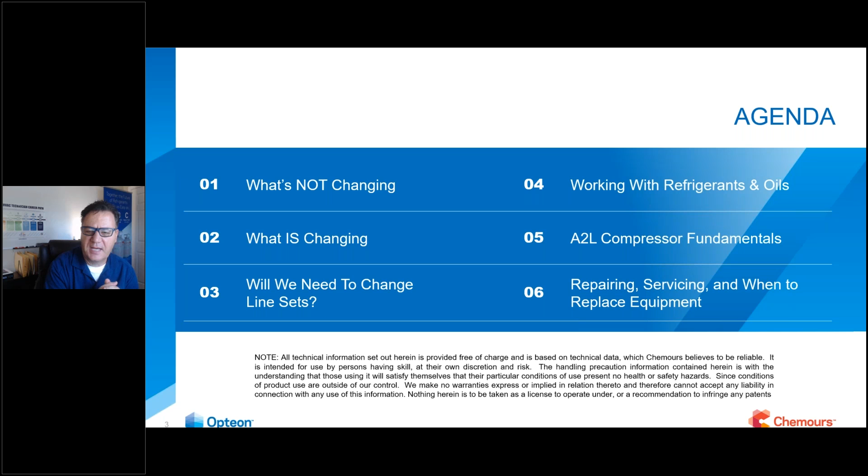Thanks a lot, Chris. So real quick, the first part we're going to talk about is what's not changing - we always talk about what's changing. The second part is what is changing. Third will be need-to-know, will we need to change our line sets and things like that. Fourth will be working with refrigerants and oils, that'll go pretty quick. The fifth will be A2L compressor fundamentals - we'll talk about what's changing. I can't speak for the compressor or equipment manufacturer, but I do know a couple things we'll cover. Last but not least is repairing, servicing, and when to replace equipment. We'll also talk a little about reclamation, recovering refrigerant.

All right, so let's go. What's not changing? As of today, you will be grandfathered in with your EPA 608. Moving forward, you'll see those questions, as we did with 410A, on A2Ls on the new test. So as of today, there's nothing federally or state recognized as far as an A2L certification. I want to be clear about that, because as Chemours does, there's a lot of folks out there giving certifications - those are certifications recognized by that organization. It just means you've done some A2L training. I've heard some people need that proof in whatever municipality or state they're in, so check with your manufacturers - do they want you to be A2L certified? Check with your wholesalers and distributors before they sell you refrigerant - do they want you to be A2L certified? But as of now, EPA does not require that.

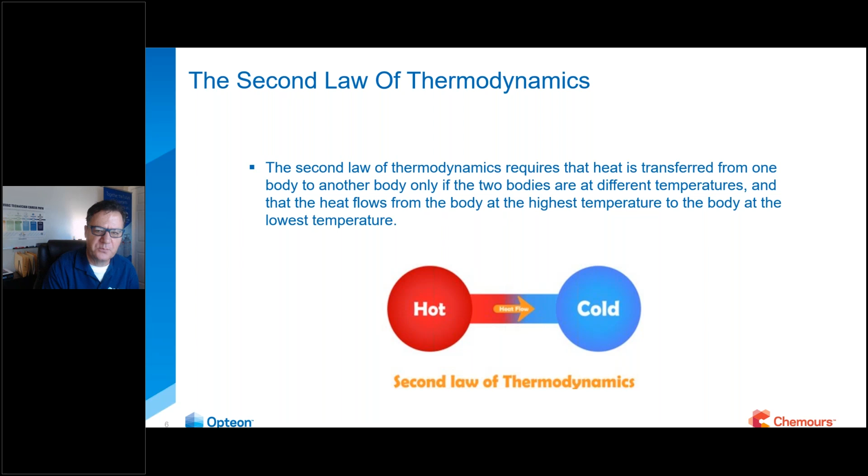What else is not changing? Well, the second law of thermodynamics. It sounds easy, but what is it really telling us? In very simple forms, because I don't like big words - hot goes to cold, high pressure goes to low pressure, and if you're into IAQ, wet goes to dry. It's pretty simple. Some people would argue that hot's really an opinion, but anyway, warm goes to cool and high pressure goes to low pressure. The reason I point that out is the system, the DX system, from an HFC to an HFO or an HFO blend, is going to stay the same. So we're still going to be dropping our pressure there at our TXV, our pressure dropper if you will. When we drop the pressure, we drop the temperature.

It's been superheated. As we move through the coil, we're not really making anything cold, we're removing heat. That's what we are, we're heat movers. As we come down the suction line, the idea is to be all vapor or superheated vapor, or we hear crunchy noises in our compressor.

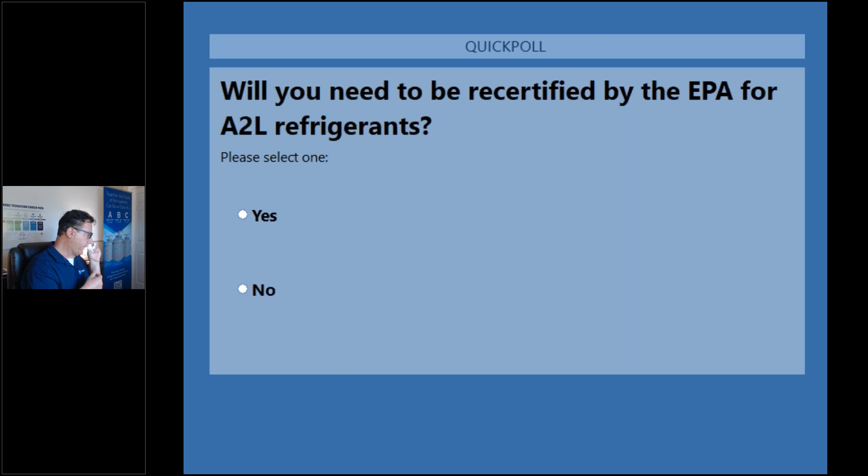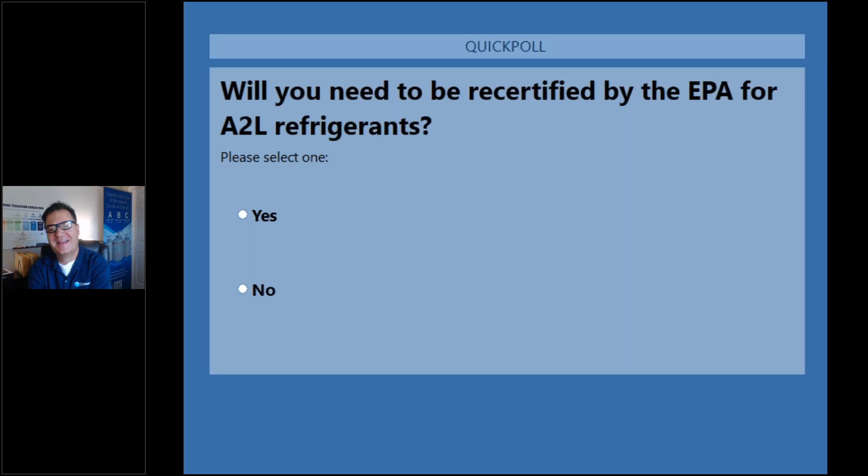Well, you seem to be a very good teacher, Don Gillis. 100%, I'm saying no, 100%. Yeah, well, very good, everyone. So at least we got that through and everyone knows, because there is a big misconception out there about that, believe it or not. So thanks, Chris, I appreciate it.

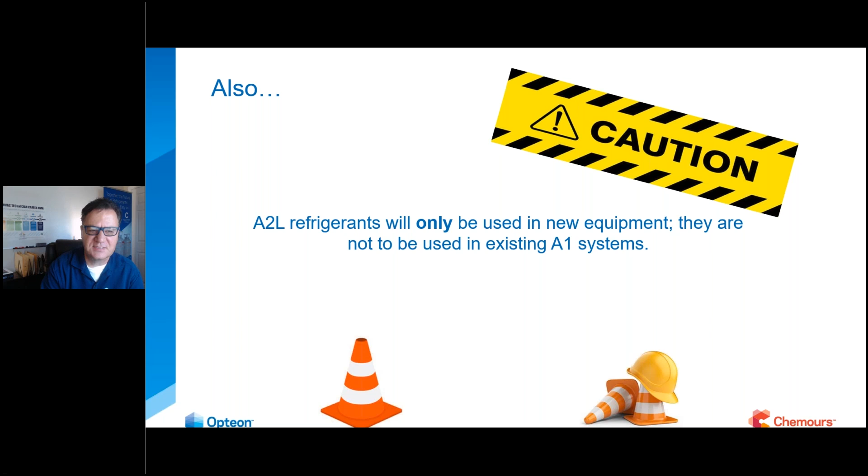Of course. What is changing? First of all, you will not be able to put A2L refrigerants in an existing system. A2L refrigerants will only be used in new equipment, whether it's HVAC or commercial or whatever. They're not designed for it. There is no retrofit kit at this time, so be aware of that, all right?

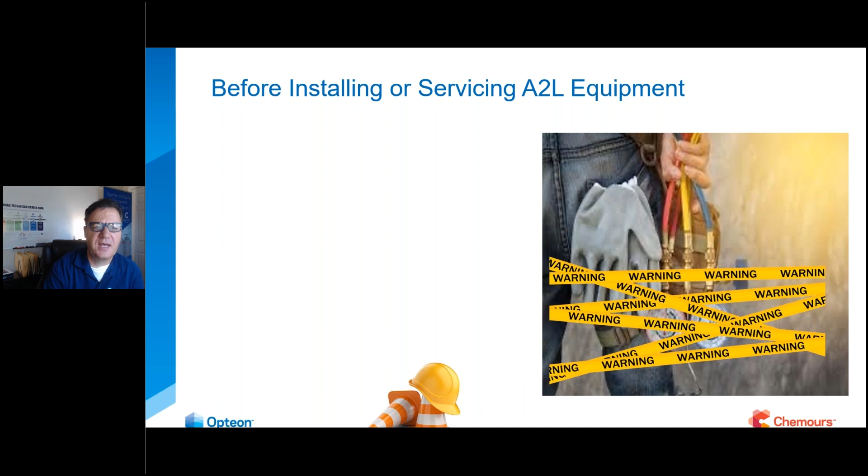Before installing or servicing A2L equipment, this comes right off of AHRI's Safety and Handling Task Force for A2Ls on their website: safety first. As always, we're going to read the manual. Follow lockout tagout procedures when needed. Verify there's no voltage present before working, okay?

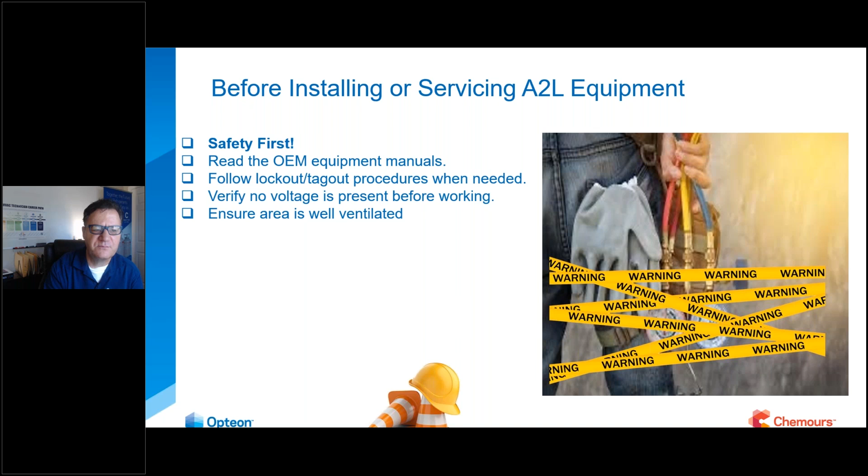And that's been something that's been around forever, okay? And in fact, all these first five bullet points are pretty much the same as it was.

Ensure the area is well ventilated. Evaluate the work area. What do you mean by that, Don? Make sure there's no ignition sources, flammable vapors, confined spaces, and look for a clear exit point.

Now, I know that sounds like a lot more than what we did in the past, but quite honestly, this is stuff we've always done when we're working with refrigerants. In some cases, we've had to use ventilation in past histories with just A1s, whatever you're using.

Now there is a big change here, the biggest one for me, is at this time it's not required, but it's recommended to have a 10-foot work perimeter. If you want to search that out, it's in UL 2-40. UL makes the standards for the safety of the equipment, ASHRAE is the safety of the installation. So if you want to find that, it's in Annex HH. It mentions that, and at this time, it is not required.

Something required would be a good visual there, like a utility company out on a corner with a bunch of orange cones or yellow tape. That's required by the state. At this time, this is not. So don't have Joe or Julie out there smoking, just obvious common sense things like that.

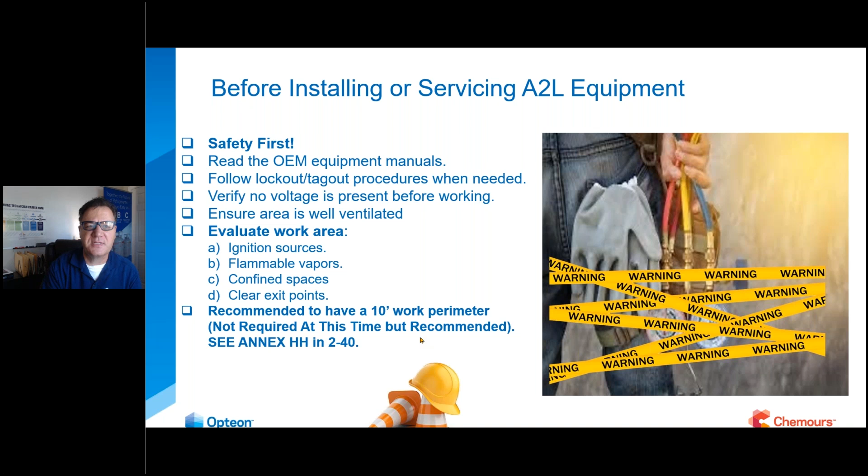Piping procedures, new install, we're still using ACR. It's seamless dehydrated and it's measured in OD, unlike plumbing that's measured in ID, okay? So use the correct size. Cut with the proper tools when deburring as required.

So don't use a Sawzall. Those little burrs out there, make sure they don't fall inside the copper. Those end up on your windings on your motor, and it doesn't happen right away. It happens, takes a little time.

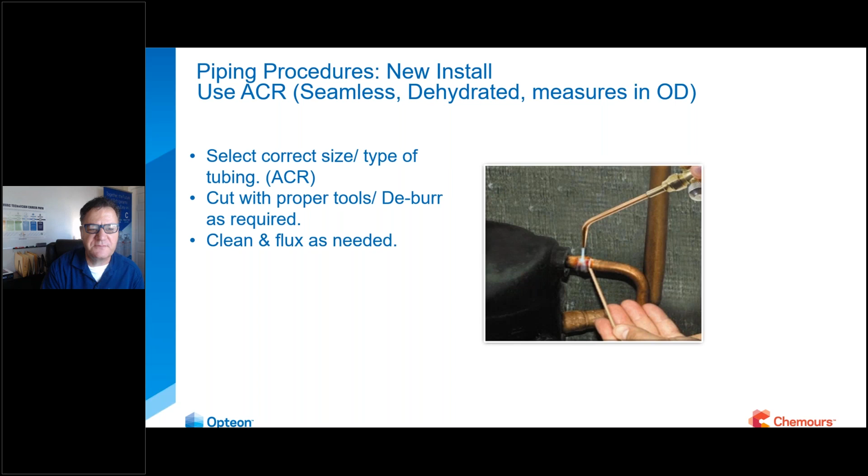If you're using flux, and I don't mean what's in your brazing rods, be very careful. Just like moisture, that's acidic, okay? And you ensure proper fit and fastening as required.

Follow all codes if you're licensed, and select proper heat source, whether that be acetylene or acetylene and oxygen. I prefer the acetylene oxygen, it gets hotter, it gets quicker. Acetylene's fine, it's lighter, it's easier to carry up those 40-foot extension ladders.

And then one other thing I wanted to share with you here about brazing. When I was taught brazing, kind of like what this torch is right here, it's heating up that female fitting. But since they changed that material to a copper-clad steel and not pure copper anymore, if you're using a torch like acetylene and you stay on there a very long time and get it cherry red, something you can share with the contractors.

It's just a film around there, that copper clad steel is. If you eat that away, it's solid steel. And I've done it twice in my life and it's a very long day.

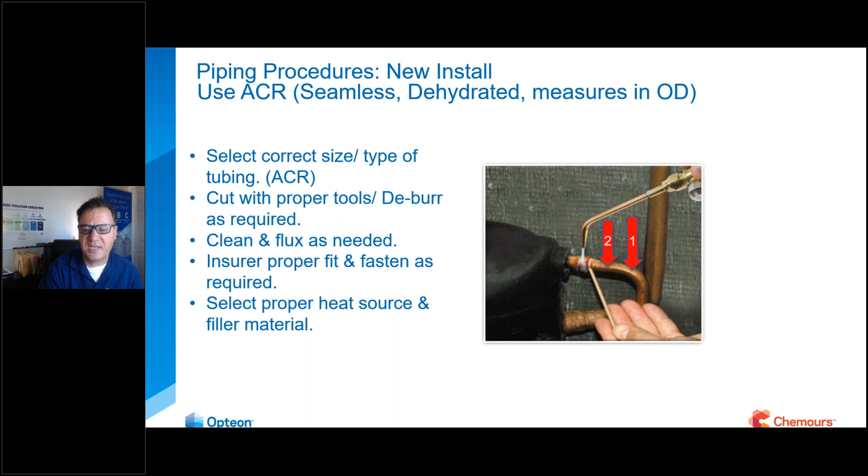So we're going to use conductive heat, one of the three heats we were taught in HVAC in our early career. And we're going to heat out here first to warm that pipe up. And then we're going to come in a little closer at the second. And then last but not least, we'll come in with that third arrow. And then by the time we get there, we're staying on there very little because it's already warm enough to suck that brazing rod in.

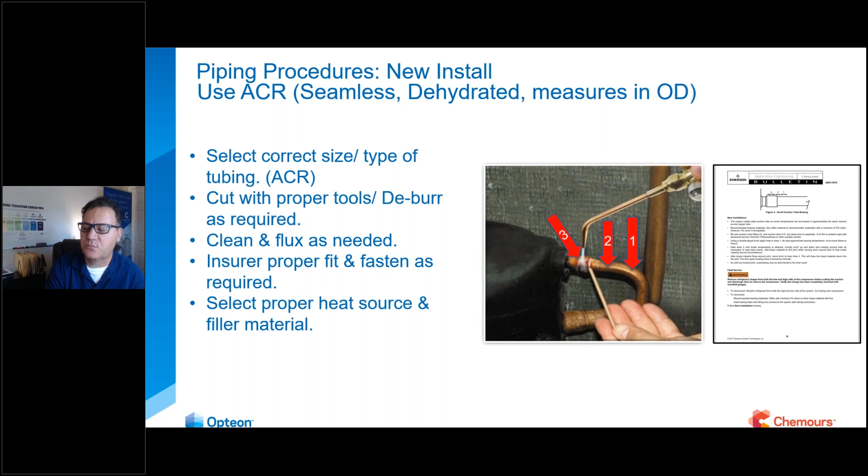There's actually a bulletin, I'm going to show you that right over here on the right-hand side that tells you more about that. I refer to it as the 1, 2, 3 step. Okay, so just a fun fact there on that.

And then we're going to purge with nitrogen or inert gas, nitrogen in most cases for that. Why do we purge with the nitrogen? This is why we purge with the nitrogen.

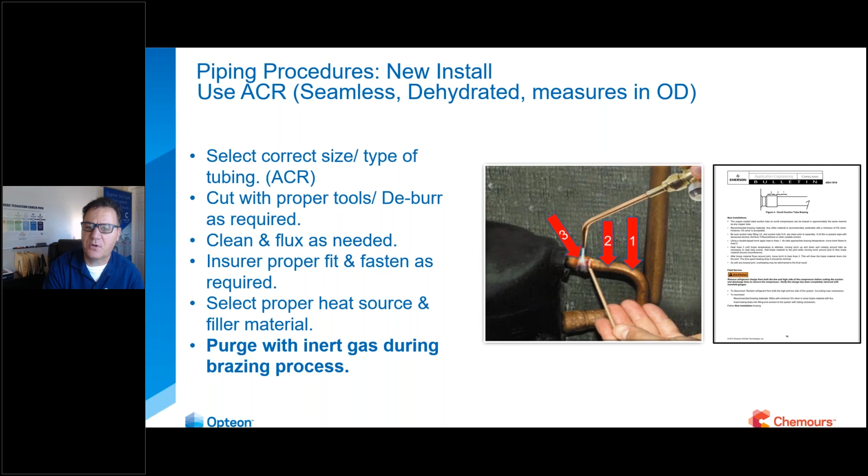This is an actual picture of something I did 6 years ago at my previous job. On the left-hand side, I went into the lab in the summertime when we were slow, and I brazed without nitrogen on the left-hand side and with nitrogen on the right-hand side. You can see the outcome here. And the ashes that you're looking at there, gang, is actually from inside. We always see this on the outside, but it was really surprised when Corey opened this up for me in the labs and cut it open, and this fell out, even for as long as I've been doing it.

The thing about this is POE oil really changed the world. It's very hygroscopic, it absorbs moisture really well, and it's very polar. It will make this look like this in a very little time.

And this stuff here normally ends up in your TXV, okay? And that's when we think we have a bad TXV, when in fact we just used bad installation practice. And I'm as guilty as anyone, just so you know, okay?

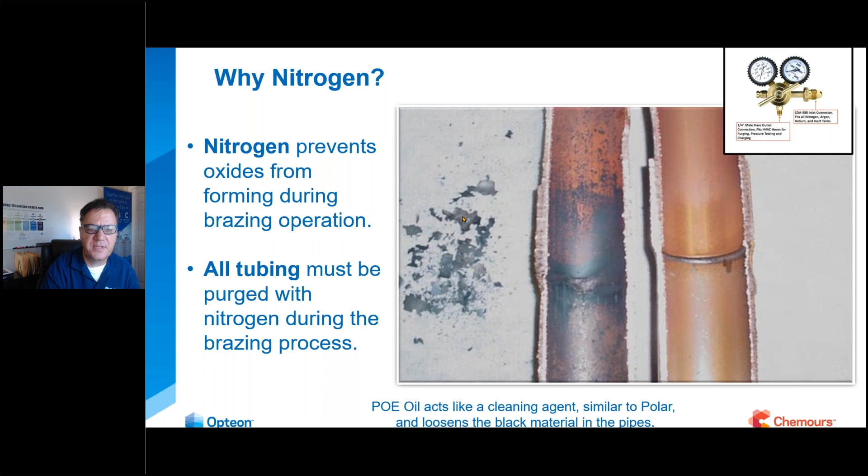When we're purging with nitrogen, some of the facts we need to do: we need to protect the components with a wet cloth while brazing. There's a lot of products out there, things like wet rags, I'm sure you know this better than I do. I just gave some samples out there. Always remove your Schrader cores to make sure you don't melt those O-rings. Hook hoses up, set the regulator for less than a pound.

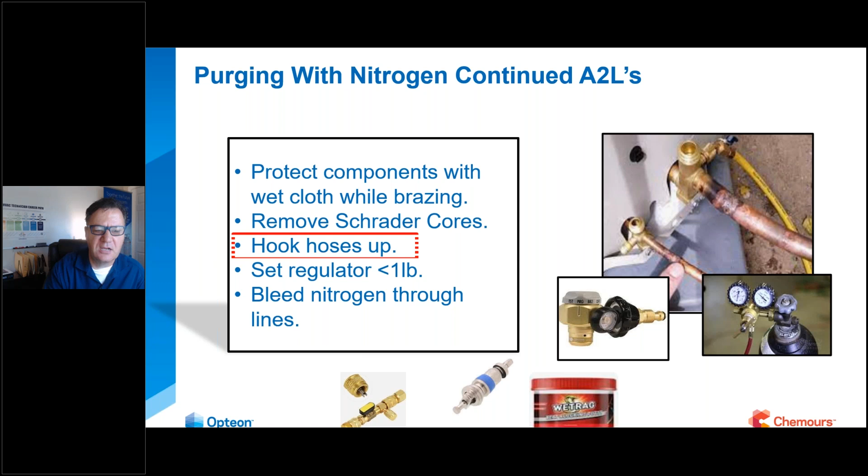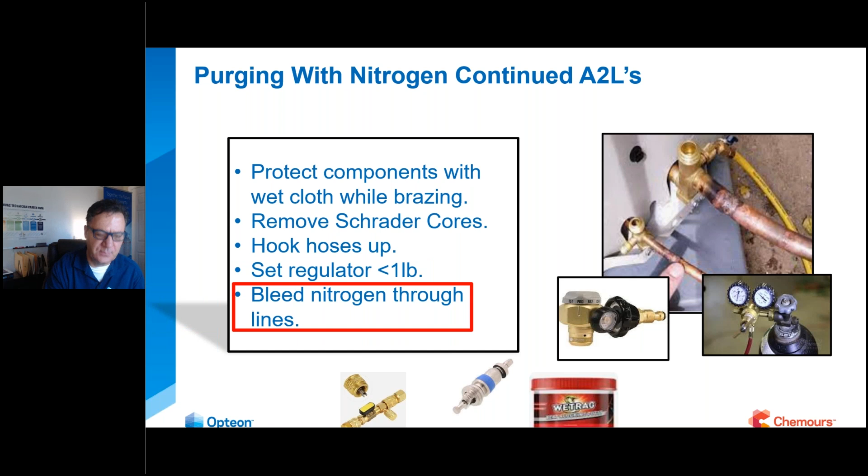So basically all you're doing, you're not pressurizing that line. I know I'm preaching to the choir here, but just to share this with your technicians at the counter, we're bleeding that through less than a pound. We're not setting it for purge. That's to remove residual refrigerant, and we'll get into that a little bit later. Then take your Schrader valves and just let that bleed through ever so slightly. Don't need a lot. You want to make sure you're still pulling in the brazing rod and then bleed the nitrogen through.

Install a liquid line filter dryer. Now I know you're thinking, why do we need to do this? When we went to POE oil, the person I worked for encouraged, or required, us to put a liquid line filter dryer in. The purpose of a liquid line filter dryer is mainly to remove moisture. It's 75% molecular sieve, 25% activated alumina that removes acid. When it comes to suction line filter dryers, it's flip-flopped completely.

So when will we change a liquid line filter dryer, Don? Well, anytime we open the system, okay? Anytime you open a system, you are required, or it's good practice, to remove that and change in a new one. Anytime you have a pressure or temperature drop - and when we're looking at pressures, if there's some kind of Schrader port, we're looking at somewhere around 3 pounds or so or more, we want to change that out.

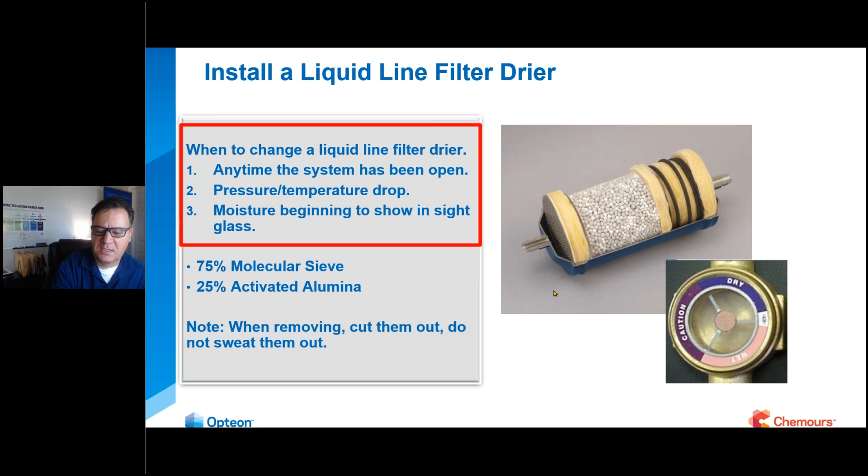If it's frosting up, obviously we have a restriction there. Temperature drops about the same thing, 2 or 3 degrees, we want to change this out, okay? Now I know this is a flared fitting here, but if this was a sweated fitting, a sweat type liquid line filter dryer, we want to cut them out, don't sweat them out. The reason is when we add heat to the moisture, we get steam, which pushes the moisture back into the system before you get the old one out, only to be caught again by the new liquid line filter dryer. So be careful with that. Cut them out, don't sweat them.

Field erected, pressure test the components. That's always been done, okay? It's always been good practice. You're going to test the low and the high sides.

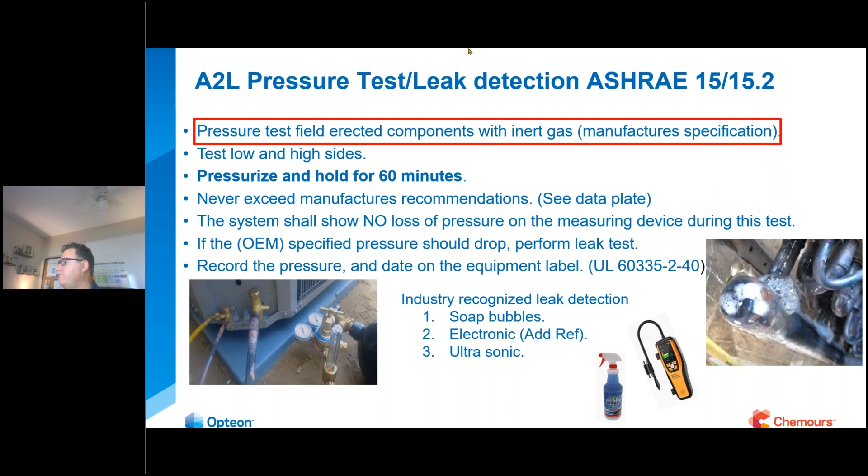And then the biggest one here for me is the third bullet point. The reason I have it in bold-faced letters is pressurize and hold for 60 minutes. This is now a requirement, okay? Before this, at least under the IMC, which I'm licensed under, we've never had a set time. So we have to hold that, put the pressure, whatever the manufacturer says, and hold that for 60 minutes, or 1 hour, and obviously don't exceed the data plate. When in doubt, if there's no data plate and it's an old system, never go over 100 pounds, because those systems didn't go very high with pressure, especially on refrigeration systems.

The system shall show no loss of pressure in the measuring device during the test. And if the OEM specified pressure should drop, we're going to perform a leak test. We want you to record that pressure and date on the equipment, label that - where we used to put it on our invoices and stuff like that. We want to document that and leave that for proof either in the manual or inside the door of the new equipment. That's in UL 60335-2-40.

Okay, so some of the things we're going to look for as far as leaks doesn't change at all. Soap bubbles, electronic, ultrasonic is for sound. It's not really that great for mechanical rooms. It's with headphones and what have you. When we use electronic, keep in mind - I know I'm preaching to the choir here, but some folks don't think about this - you can't just use nitrogen.

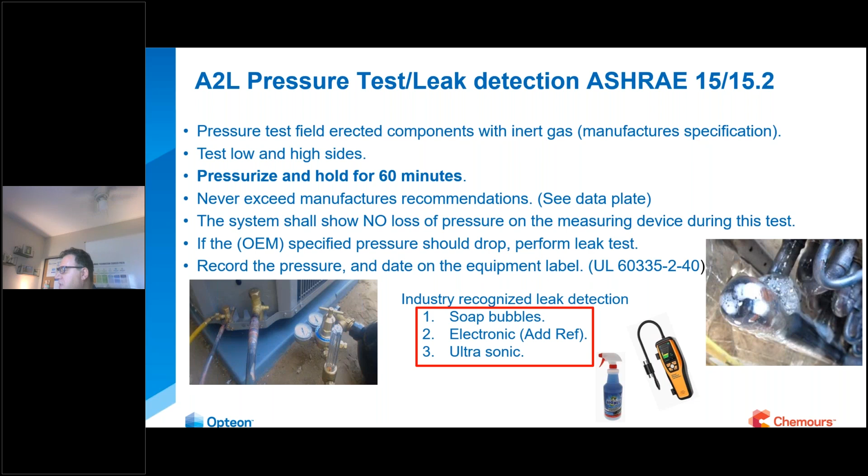You got to put a little trace of refrigerant in there and let that sit for it to find the leak, okay? System evacuation, removing non-condensables.

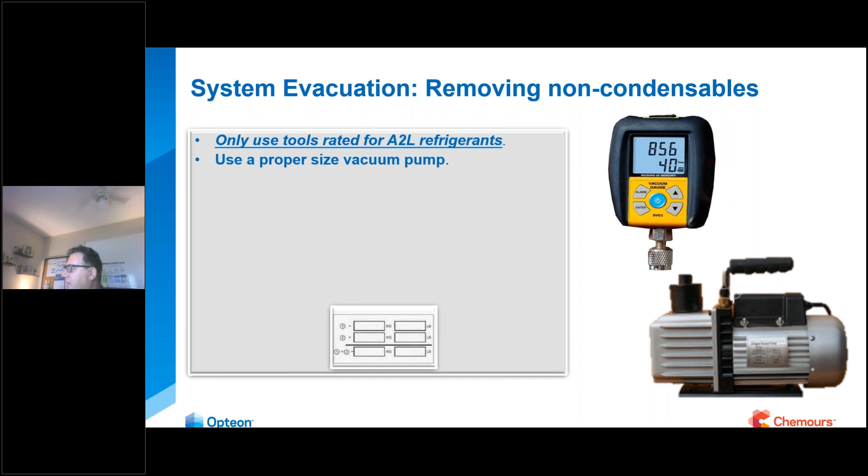Not a lot of changes here, but take a look at it. Use a proper vacuum pump. There's a scale or a mathematical formula you can use. Quite honestly, more importantly than anything, change your vacuum pump oil.

A 7 CFM pump will cover about everything out there, almost 90% of the stuff. So I don't get hung up on the size of the pump, because honestly a 1 CFM pump will pull a system down to 500 microns. It may take a week, but it'll pull it down.

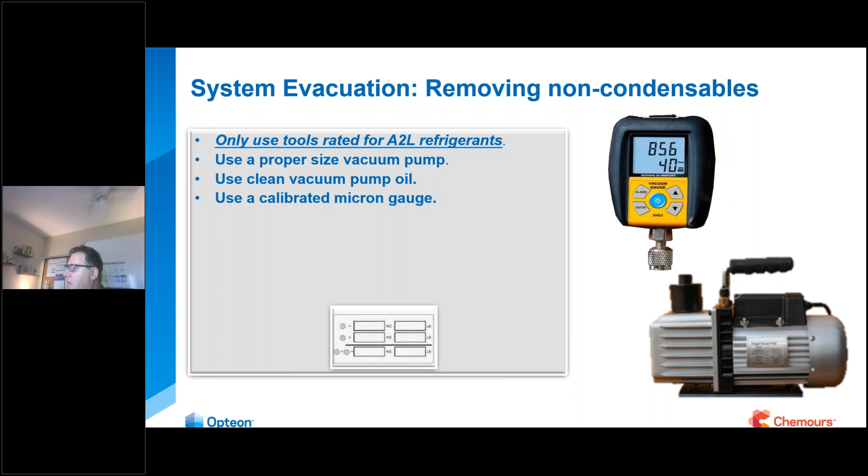Use a calibrated micron gauge. They sell that stuff at your counters there. When in doubt, you can use rubbing alcohol or good old brake fluid, something I've always used in the past. The accepted industry standard for a quality deep vacuum, per EPA standards, has always been 500 microns or less.

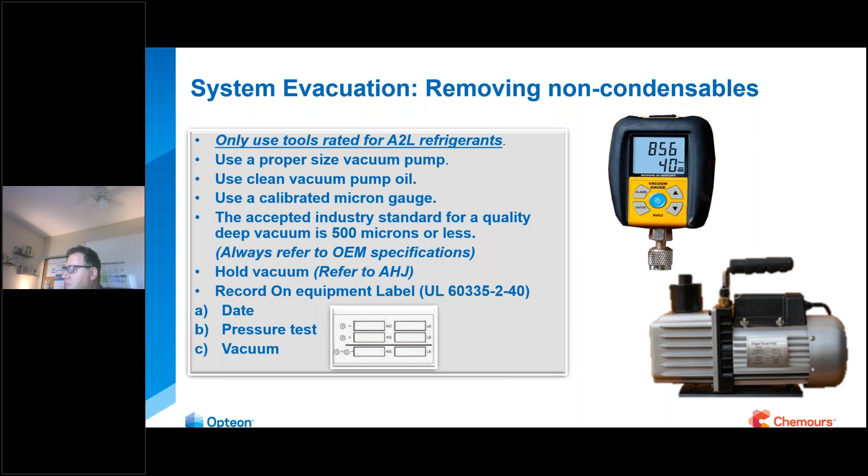You need to hold that vacuum and then refer back to your local jurisdiction, because at the end of the day, if you're not under any codes, the local jurisdiction has the final say. You're going to record that on your equipment label, per UL 60335-2-40: date, pressure test, and the vacuum. You'll see a lot of these decals inside the equipment door if you haven't already.

Using a two-stage vacuum pump, real quick, some fun facts here. Occasionally I'll suggest performing a blank off. A blank off simply means hooking your micron gauge directly up to your vacuum pump, and you should be able to pull down to at least 100 microns. Okay, open your ballast when starting up.

You see most of those fumes and vapors at the very beginning as we start to pull down, and then you hear the motor of that two-stage vacuum change speeds or sounds. That's when it starts to drop even lower. Primarily, most of those non-condensables and moisture are moving literally within the first 15 seconds. So by opening the ballast on your system counterclockwise, it's like opening a vein. It bypasses and introduces dry air, which helps it not condense with those pistons in that motor, and drops that moisture down into the oil, okay.

Some manufacturers say when it gets to 3,000 microns and drops down, shut it off. Some folks say 10, 12, 15. Check with your manufacturer on your vacuum pump. The moral of the story is: start to shut it down and then monitor your pull down as usual, okay?

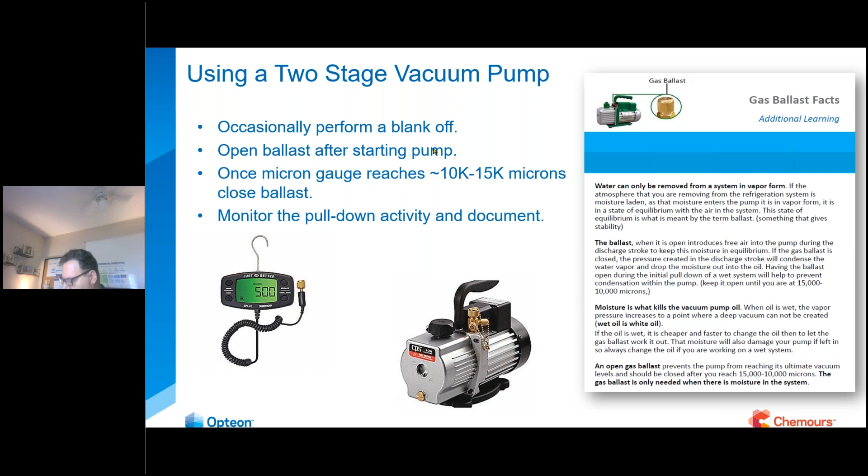This just happens to be a document on the right-hand side I wrote years ago. Keep in mind, if they're not using micron gauges - this is a fun fact - if they're still using compound gauges, a compound gauge will not pull down and tell you how tight the system is and how much moisture is in there. And close doesn't count when it comes to moisture, all right?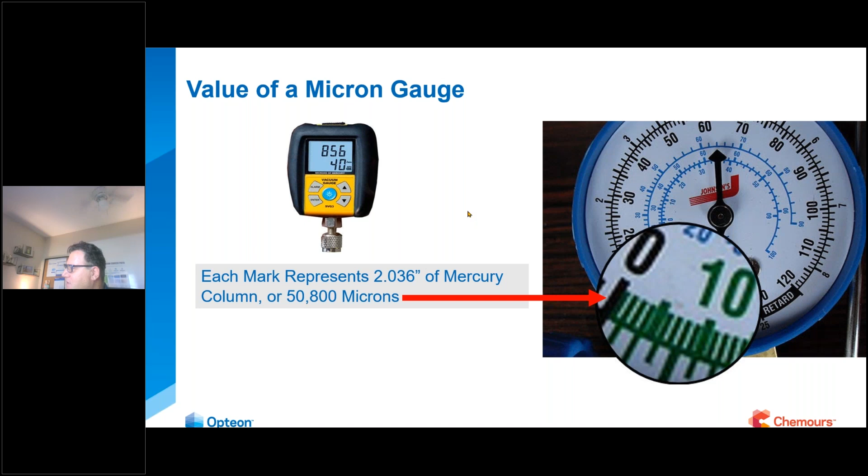Every hash mark in here, I blew this up, is about 2 inches of mercury. 2 inches of mercury column is about the equivalent of 50,800 microns. And we said we wanted to be at what? 500 microns or less. So again, close does not count - there's still a lot of moisture in there, all right?

To give you an example, on the face of the earth we boil moisture or water at 212 degrees. We have 760,000 microns, our gauges are zeroed out. I'm going to move down to 50,000, just because that's about what those little hash marks equate to between. Our gauges are reading somewhere between minus 27.95, and we're boiling water at 101.

At 500 microns, the significance is we're almost close to that minus 30 that we all said, hey, let's get out of here - that's utopia, a perfect world. We're actually boiling that moisture in that system at minus 12 degrees. So by pulling that down, we're changing that atmospheric pressure inside there, and pulling it down less than atmospheric pressure means we're boiling water at less than 212 degrees. Now we're at minus 12, so we're getting all that moisture out.

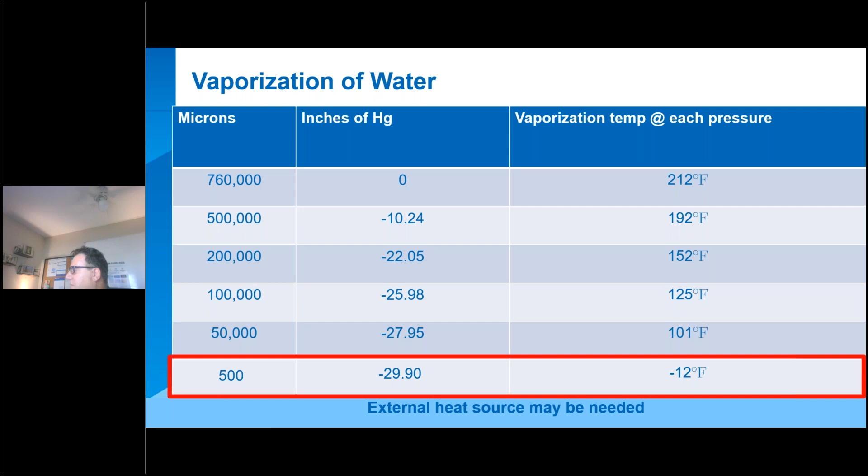So why the 500 microns? We didn't just pluck that out of the sky. They discovered at 500 microns or less, we proved that the system's not only tight, but it's dry. If it starts to creep up above that, 1,000 microns or so, the vacuum is still tight, but there's moisture in there. So when that starts to creep up a little bit, as you probably know, it's not the end of the world.

We just pull another vac down, kick it back on. We might have found some moisture in the oil somewhere. Now, if it keeps creeping up and going up on you, then we got to start looking for a leak, okay?

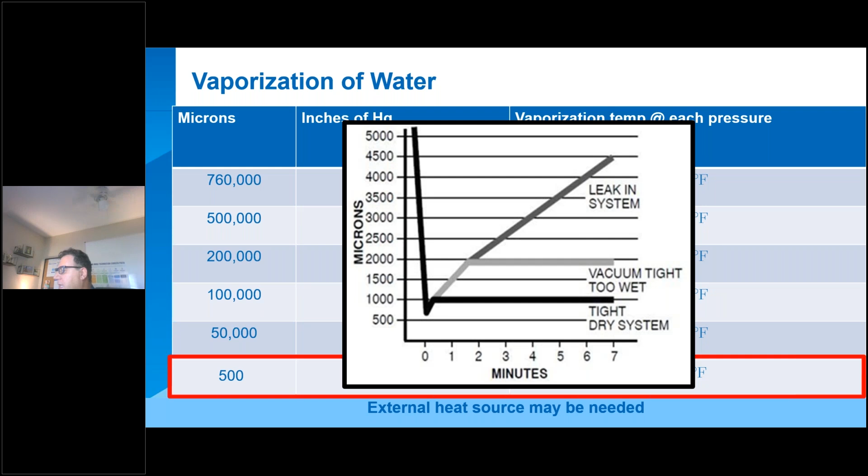All righty, let's get to it.

Next question is, when testing an A2L refrigerant line set, you must hold that pressure for a minimum of how long? All right, this is a really cool question. We were just talking about pulling a vacuum. Next, we're going to be talking about pressurizing it, right? Talking about the line sets that you guys have running from the outdoor units to the indoor units. How long do you need to hold a pressure test for? 30 minutes, 60 minutes, or 90 minutes?

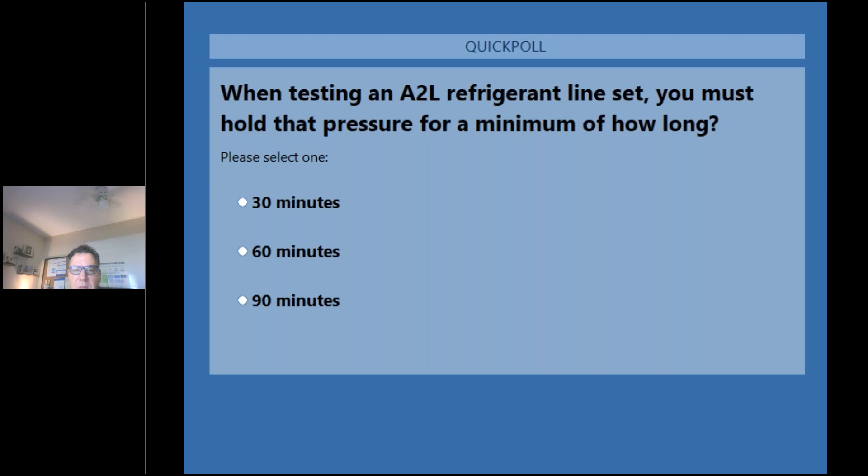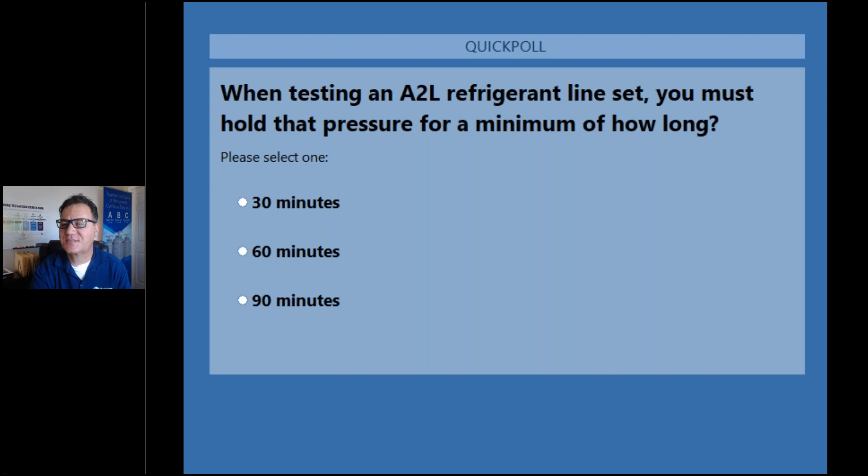And let's see how we're doing with responses. But this is a different kind of crowd today, Don. We've got 100% going with 60 minutes. I've never seen 100% coming out of these polls. Yeah, for sure. That's great. That's awesome. I love it. Yeah, good for you. Yeah, somehow my webcam.

How many people answered the question? Oh, let's take a quick look. Half the group voted. Okay, good. So I guess we got 27 people on the line, and so half of those. Awesome. Awesome. Very good. All right.

Okay. Can you hear me, Chris? Yes, sir. Yes. Okay. Moving on. Sorry about that, gang. Somehow my audio and everything changed on me.

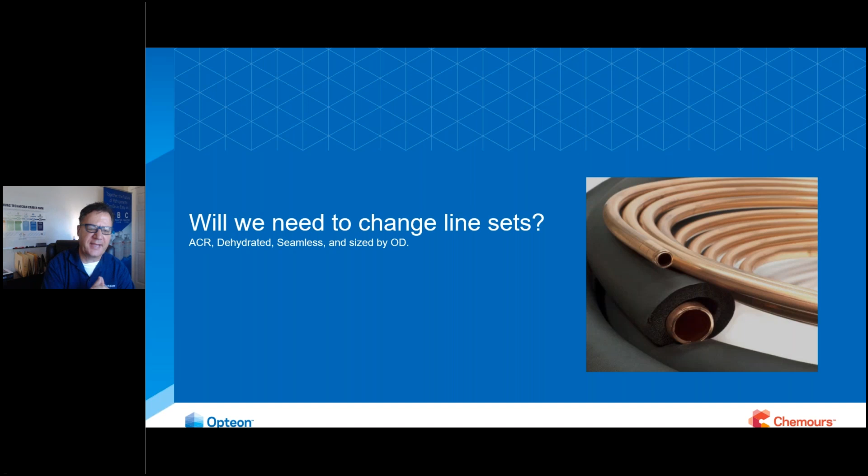Hey, will we need to change line sets? The answer is yes and no, okay? So if it's the same size as the line sets are for the new equipment, you can keep them in there. Now, what they're going to want you to do is prove that on the new installations, it's required in 15, which is commercial, 15.2, which is residential, that you need to use striker plates if it's within 1.5 inches from the wall before the drywall or whatever that wall surface is. And this has been around for years. Under the IMC, which I'm licensed under, this has always been around. And throughout my travels throughout the nation, most people are already aware of this.

But moving forward on the A2L refrigerants, not just plumbing. Most people identify this as a plumbing thing with copper lines. You need to use these, what I call striker plates. I've heard them called nail guards, whatever that is. It's about a 1/16 inch piece of steel. So when Mrs. Jones or Mr. Wilson comes along and tries to drive a nail through here or a screw, they're going to know they're striking into something. It's just not going to go in. So moving forward, now on existing systems, they're going to ask you if you can't prove that nail guard is in there, which is going to be hard sometimes, obviously.

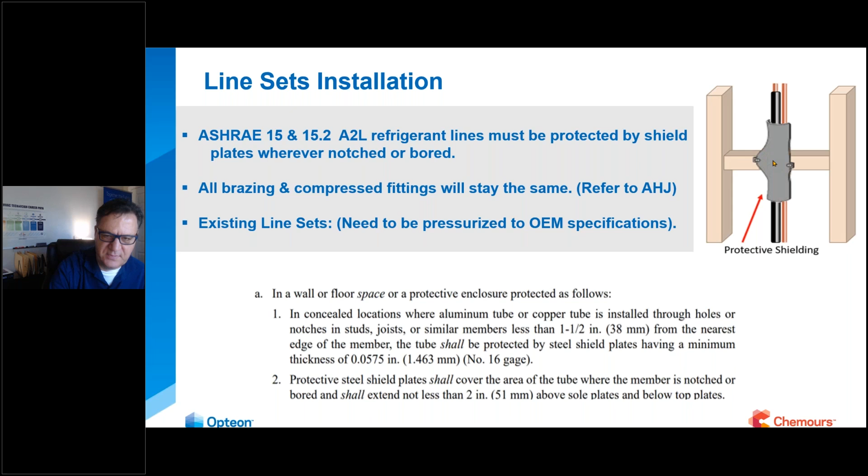They want you to pressurize that line, and again, they want you to hold that for 60 minutes, okay? So that's something you have to document, all right?

Now, when we talk about line sets, real quick here, there's 2 reasons we size line sets for what you sell to the contractor. And that's velocity and volume, okay? So in the volume, if the line isn't long enough—let's say this suction line, for example—if it's too big, it's got enough volume to cool that motor on that compressor, but it doesn't have enough velocity to bring the oil back. And if we were looking at the liquid line, if that was too small, it's restricting that, can't bring the velocity back with the oil, and the TXV, quite honestly, is irrelevant at this point because the system is designed to have that pressure drop exactly across that TXV. So if we've got this pinched or too small or kinked or whatever, it's volume and velocity, okay?

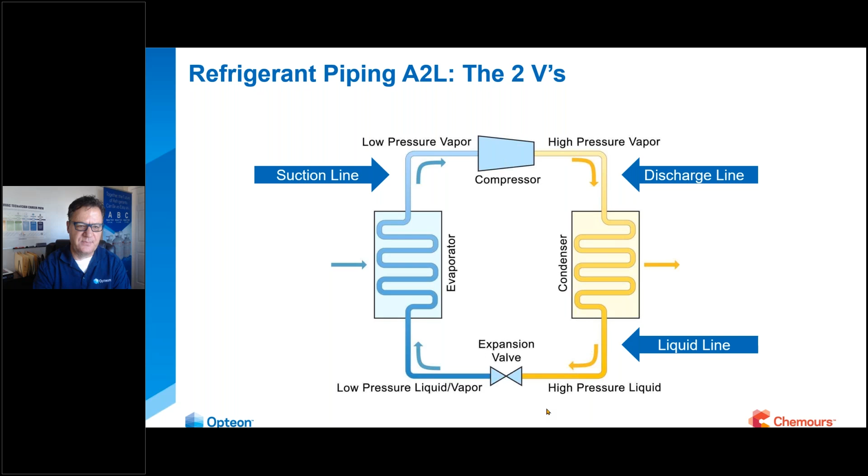I always encourage contractors, don't argue with the people at the counter, okay? If they say it's got to be 7/8 and 3/8, that's what it's got to be. Don't go to 3/4 just to save a buck, because you will pay for it in the end.

All right, working with refrigerant oils. Quite simply, POE oil again changed our industry. We didn't know a lot about it, and some of the characteristics are it's very hygroscopic, so it absorbs moisture very well, and it's an organic form. The main process is removing that moisture. Again, it acts as a polar agent. I don't want to make it out to be RX11, but it's pretty darn good. It acts as a solvent and will wash things away.

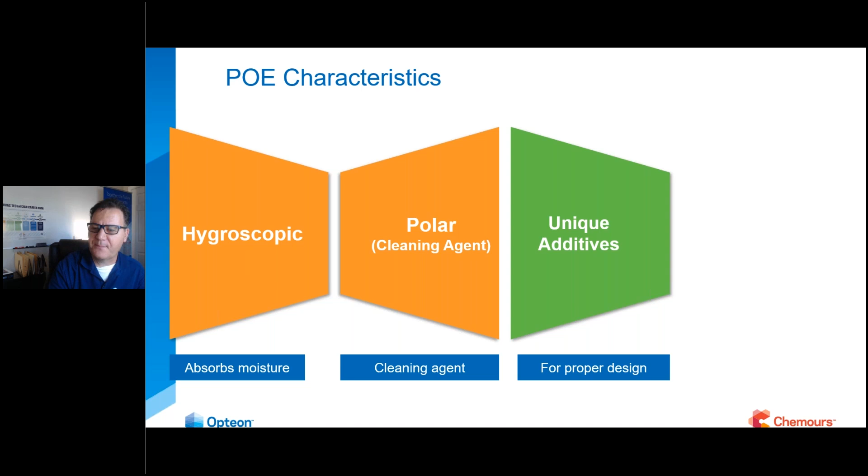Unique additives for proper design. And then, last but not least, it will hydrolyze in the presence of water, which simply means it breaks down in water. A2L compressor fundamentals.

Let's talk about some of the changes. So if you have someone come to the counter and say, can I just use this 410A or this R32? No, there's differences. Let's start with the 410A. It's an A1 compressor designed for 410A, okay? 454B will have its own model number. Let's talk about Copeland or any of their competitors, and the reason for that is different pieces, different materials, because of the possibility of the HFO refrigerant acting differently in there. It's classified as an A2L.

The biggest thing you're going to see is the thing outside the compressor and the way they're casing those electronics. Again, this is all UL required, okay?

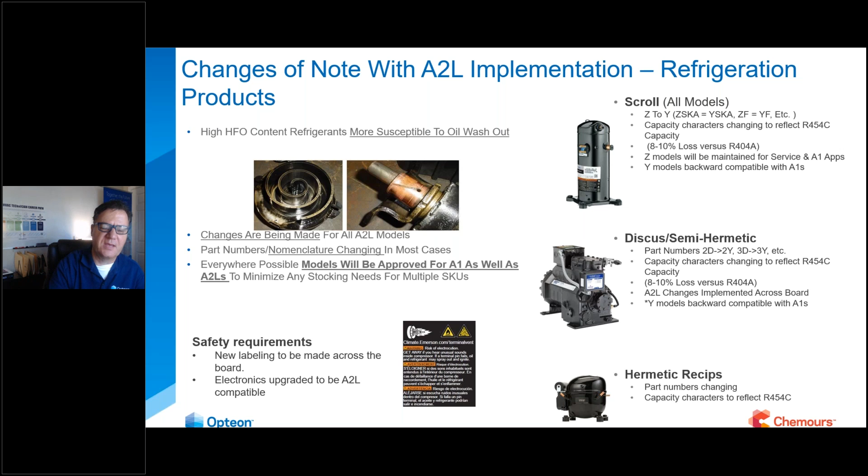And when it comes to the R32, it's an A2L compressor like the 454B, but that POE oil is going to be different. It's going to be a POE 46. So 410A is a POE 32, 454B is a POE 32 also, and then R32 will be a POE 46, but they're all different in each one of their ways, so be aware of that.

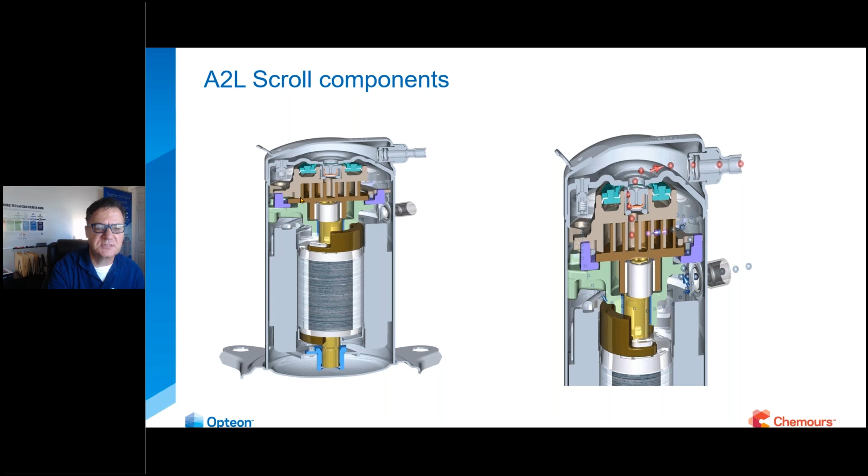Speaking of A2L components and things like that, you're going to see some difference internally. You won't see them actually, but the bearings have been changed, things we call the Oldham coupling, for those of you that see me tear compressors down in the past. This bottom orbiting scroll will be different.

And then one last thing, I want to talk a little bit about the importance of compression ratio, because the number one reason A1 and A2L compressors will fail is overheat. And the number one reason for overheat is compression ratio, and that's simply saying this: either the head pressure is too high, the suction pressure is too low, or both, and that can be either way.

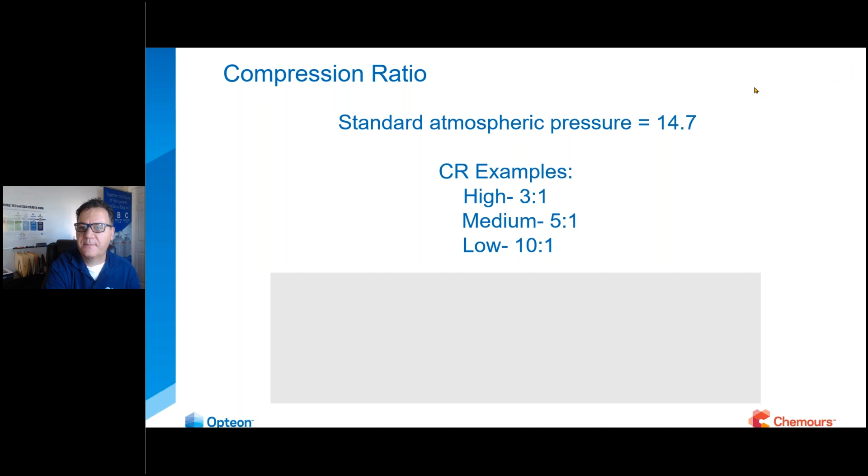All right, so I'm going to turn my camera off there. So giving you some examples here. Let's talk about this right now.

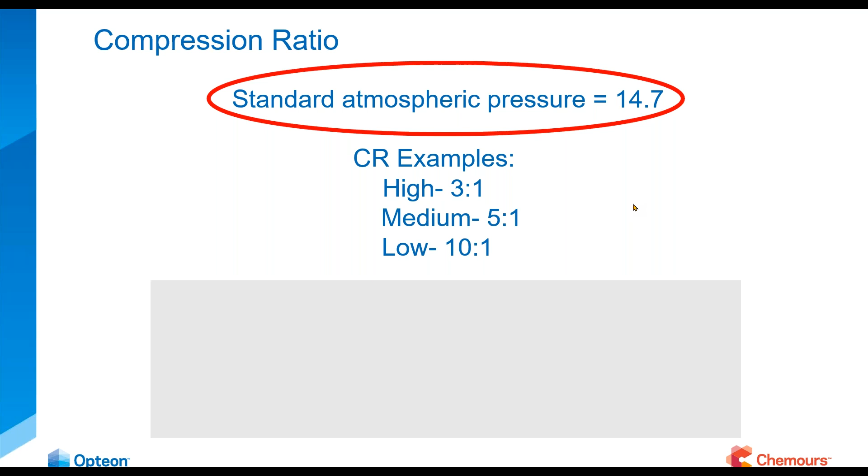Standard atmospheric pressure we say is 14.7. When we talk about how to calculate compression ratio, it's quite simple. All we're doing is taking whatever's on your gauge, whatever it reads. In this application, I'm using a low pressure or freezer type application, -35 on the EVAP or SST. So my high side is 185, my low side is 5. I'm going to then add 15 -- that comes from the 14.7, I'm just rounding up to make it easy math. We add that to it, we get 200 over 20. We divide that 20 into the 200, okay? Whatever you get out of that answer, put it in front of 1, whether it's 5, 6, 7, put it in front of 1. That's your compression ratio.

These are good numbers. If you're working with air conditioning, we often refer to that as high temperature, it's about a 3 to 1. Medium temperature, your reach-in coolers -- baloney, beer, pop -- it's going to be about 5 to 1. Your low temperature freezer application is going to be somewhere around 10 to 1, okay?

The higher that compression ratio goes, the harder that compressor is working. So if you walk up to an air conditioning system and you're reading 10 to 1, you're probably not seeing 225 degrees 6 inches out from the compressor. You're probably reading really hot. So if you know what the temperature should be leaving the compressor, and you know what the compression ratio is entering the compressor, you just kind of made that compressor, let's say, plexiglass -- you just told yourself a lot about that system.

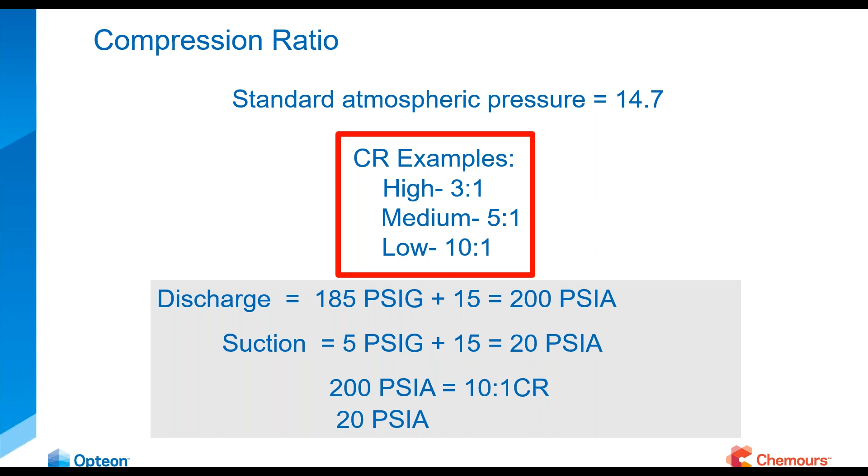So just a fun fact there on that. We have a chill zone poll time. Chris? All right, sounds good. Let's have it come on up.

Okay, according to the EPA, a refrigerant line should be pulled down to a vacuum level of what? So what's the micron level that we should be pulling it down to? Is it 500 microns or less, or is it more than 500 microns? Let's see how people are answering.

So we did start talking about that a little bit - the micron gauge, I love that. Was new information for me, Don. The hash marks on the gauge is 50,000 microns, and it's really interesting to see that you really do need digital tools for that. Absolutely. So a good encouragement to get those micron gauges in those folks' hands out in the field.

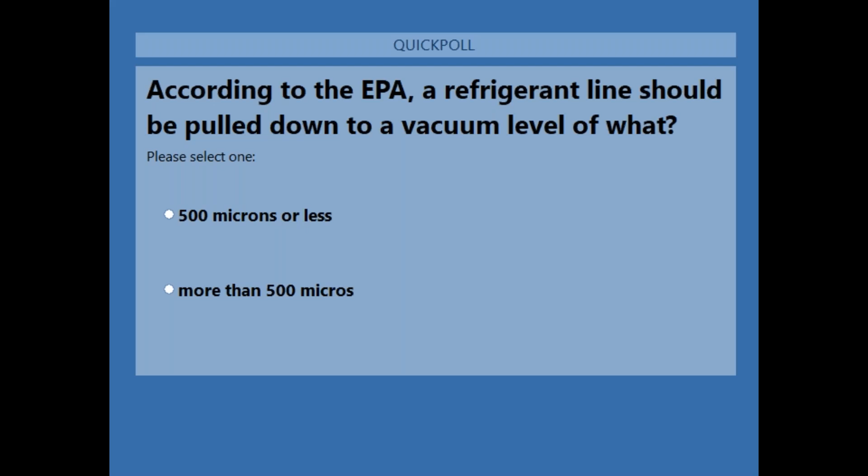So thanks, Chris. A2L repairing service and when replacing - we're in the down stretch now. We're going to talk about recovery first, okay? Obviously, we walk up to a system, we're changing the system out to 410A. I had the luxury of doing this a couple months ago. I actually tore out a 410A system and installed an A2L system. The joke there is I installed an A2L system and lived to talk about it.

So step one, recovering that refrigerant. Notice the red stripe around the recovery tanks - that's what's going to be coming on the recovery tanks, just as you will see the A2L tanks. Always use proper PPE and lockout, tag out if needed. Again, you're going to have that 10-foot radius recommended at this time.

Please don't make that required moving forward. Be safe. And quite honestly, this is stuff we've always done - look around, make sure everything's safe there. When you're on a job site, a commercial job site, when OSHA's on the site, we don't want splice cords and things like that. It's the same concept. And obviously, never vent refrigerant.

It's in your EPA. Pull a vacuum on the recovery tank - you want to remove that moisture even from a new recovery tank. If you didn't know that, pull that down, and the number there too, if you don't know, is going to be 500 microns or less, by the way. So we want to pull that down, even if it's a new tank.

Use only A2L recovery cylinders and never mix A2Ls with A1 refrigerants. All tools should be rated for A2Ls moving forward. It doesn't mean everything in your truck is not A2L - check with your manufacturer or check with your wholesaler. Use liquid line filter dryer, as we talked about.

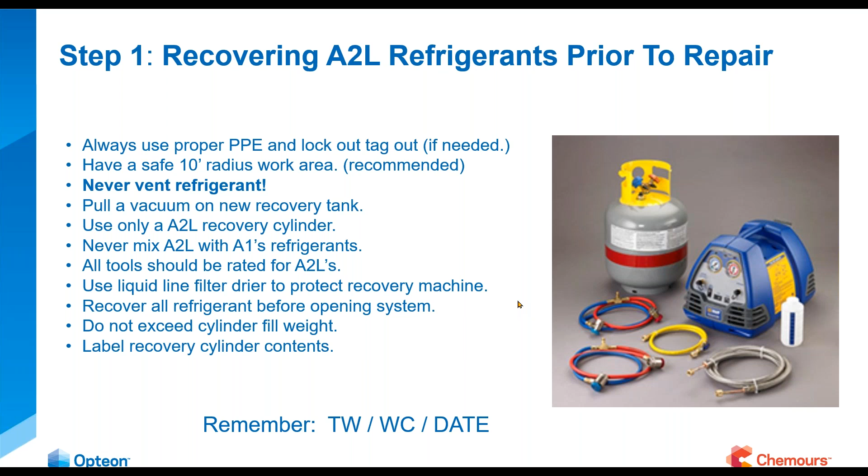All right, so recover, recycle, reclaim - I want to go over these real quick, even though I'm preaching to the choir again. Recovery, we recover the refrigerant from that property at Mr. Smith's house. That is Mr. Smith's refrigerant. But let's say it's Mr. Smith's rental properties - that's his refrigerant wherever he owns properties.

So it could be on Vine Street, and you can recover that and move it over to Maple Street, as long as that's still Mr. Smith rental properties. If you take it from a Walmart on the south side of town, you can put it in the Walmart on the north side of town, okay? Recover it. Whoever owns that equipment owns the refrigerant, but it doesn't necessarily have to go back on that property, okay? It's the owner of the equipment.

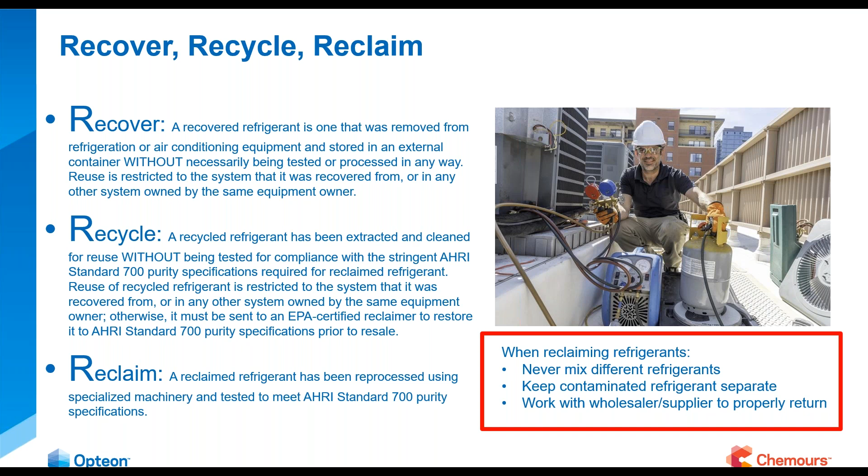Recycle is exactly like recover, except you took an extra step, maybe a liquid line filter dryer, some way to clean that up a little bit, maybe remove some particles, but not up to the standard of purity of like we buy R22 today. Reclaim is just what it says. You went the full circle here, you brought it back to a reclaiming company or a wholesaler, and it was reclaimed back to AHRI Standard 700 for purity specifications, like virgin refrigerant is. And that's how we buy R22 today.

Okay, always follow manufacturer's literature. Use inert gas when removing any residual refrigerants. Okay, this has always been good practice. Okay, now it's going to be required for A2L refrigerants. In other words, when you cut that line open, okay, just like we had our nitrogen out earlier to braze with, okay, we're going to put that on the line there.

That's what the purge setting is for on your regulator there, in case you didn't know that. I know the folks at the distributors know this, but share that with your customers, okay, because a lot of folks don't know that. We want to blow that residual refrigerant out of the A2L.

You know, a lot of folks think when we put our torches down there, including me, by the way, when we cut those lines open, we go to repair, we see that little lazy flame, that little bit of flame there, like a candle, if you will. I always thought that was oil, but no, that is, in fact, residual refrigerant from an A1 refrigerant. So just a fun fact about that.

Moving forward, it's going to be required. It's always been recommended, always been good practice, okay? Ensure equipment's grounded. Use a proper capacitor discharge method, whatever that looks like to you. Use only OEM approved A2L replacement parts. That's key. When we're working on new A2L equipment, you only can put the A2L approved OEM part back in, okay? That's going to be a staple.

Install the new liquid line filter dryer, as we talked about. Use nitrogen before and during brazing. And when people argue and say, hey, it's such a hassle getting all this nitrogen out - if you think about it in the long run, okay, you're going to get the nitrogen out to pressurize the line anyways. You should have the nitrogen out when you're brazing. And that makes it easy, the reason for the argument of having it out to remove the residual, because you're only going to get it out one time, but you're going to use it three times.

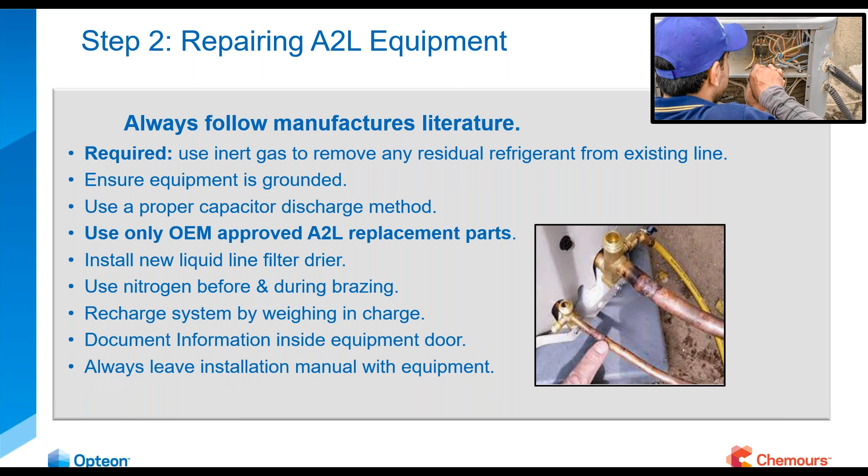In closing, let's talk about charging the A2L system. There's not a big wow factor here. We're still going to do the same things. Again, recommended, that 10-foot work area, safe work area. All right. Charge blend refrigerants in a liquid state. Any blend refrigerant, we always want to have the tank upside down. We all know that. All right.

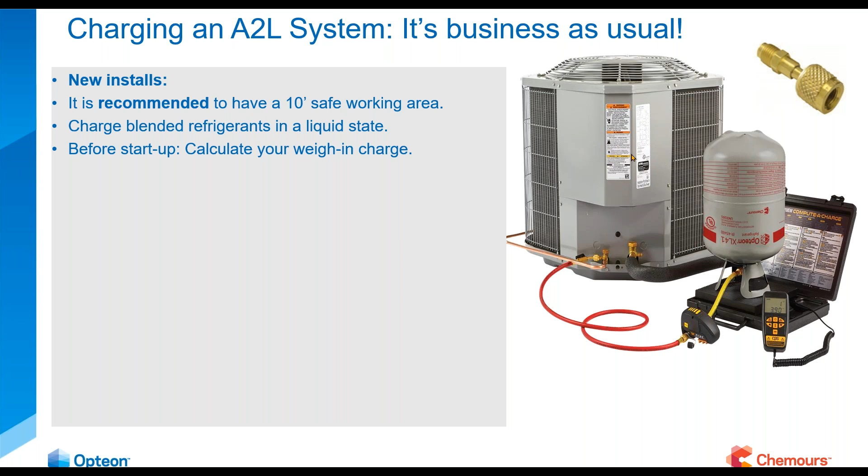Calculate your weigh-in charge. What do I mean by that? Typically, and I'm just ballparking this from my experience, let's say this outdoor or air conditioning unit shows up, let's say it comes with 15 foot of charge. That's 15 foot of charge for 15 foot of line set. That also is for the evaporator. Anything beyond that, you have to have a multiplier. So we're going to start that charge on our liquid side before we release that refrigerant or turn the equipment on. We want to load up on the liquid line. We don't want to load up on the suction line because we don't want to slug that compressor.

All right, the initial startup. Then when we start up, we want to verify the airflow and then liquid charge on the suction service port, and be very, very careful there. All right, we want to goose it or throttle it just a little bit to dial that in. Okay, and then beyond that, we want to start our metering.

Don't slug the compressor, and then use our PT charts to calculate the subcooling, the superheat. Did I mention airflow, airflow, airflow? If the airflow is not right, nothing else matters, right?

I know when universal motor fan motors came out, guys would put those in and not cut the shaft down or move the fan up high enough. As long as they cleared the compressor, they'd keep it low. But there's a lot of science that goes into that shroud up there by the grill.

Label match everything for A2Ls, keep literature in the indoor equipment, and then use calibrated gauges. What do I mean by that?

If you have a system that's running good, but your gauges look like they're a little off, typically most technicians will have a second set of gauges. If you go back and grab that second set and it's reading different, the easiest way to calibrate—a lot of people think you just go behind the mercury gauges and adjust that screw.

But in reality, on our gauges, we have our pressures and we have our temperatures. Those temperatures are saturation temperature. The low side reads the evaporator, the high side reads the condenser. Saturation by definition is liquid and vapor in combination with each other. It only takes one drop of liquid with vapor to be considered saturation.

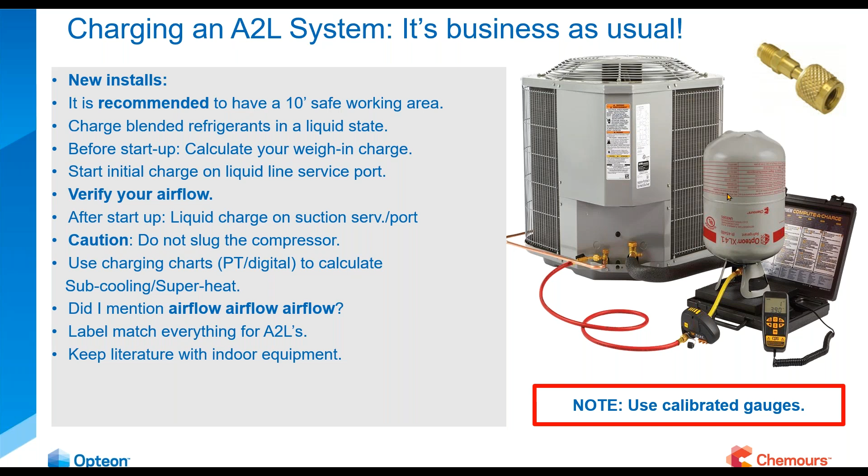So what are we gonna use for our charge? For years and years, for 410A since the 90s, let's take a 3/4 inch, 3/8 line set for example. So we have 3/4 inch on the suction side, 3/8 liquid side. We've always used the calculation of 0.60 ounces per foot beyond that, whatever the factory charges, and the condenser, okay?

Moving forward, if you want to know what 454B is, it's going to be fairly close to that 0.60. If someone would forget, it's not the end of the world, but if you want to really be exact about it, which most good technicians do, it's going to be 0.55, okay? So the same application, 3/4 inch suction, 3/8 liquid, you're looking at 0.60 for 410A, 0.55 for 454B. And what does that have to do with?

It has to do with the density of the refrigerant, right? Because R22 wasn't what 410A was—it was different, we had to understand that. Just like when you take a replacement for R22, like NU-22 or Mo99, that's a different density, and your weigh-in is totally different, okay? Just a fun fact there for you, all right?

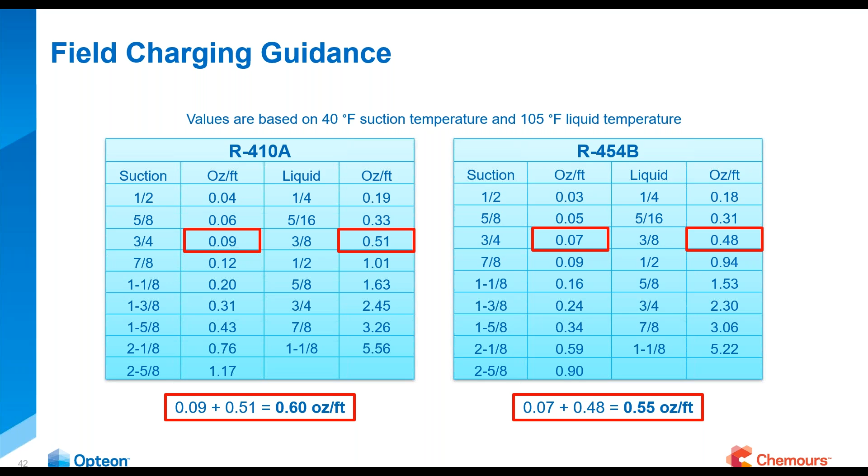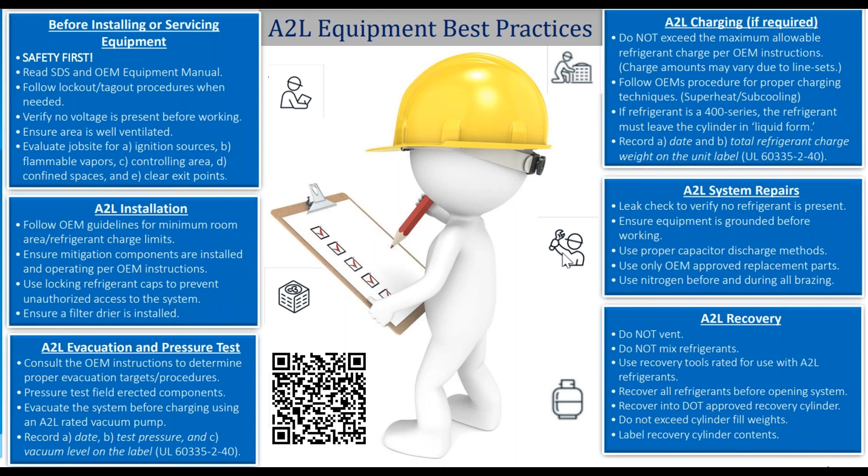Additional support for you: you can find this little slide, just like it is, as a PDF on AHRI's website. Go there, it's in the A2L Equipment Best Practices under the A2L Safety and Handling Task Force Good Practices. So this is a nice little thing to show.

All states, as far as I know—correct me if I'm wrong, you can shoot me an email, shoot Chris an email—allow a qualified A2L refrigerant, but some don't have them in the code books just yet because they run on cycles every 4 years or so, okay?